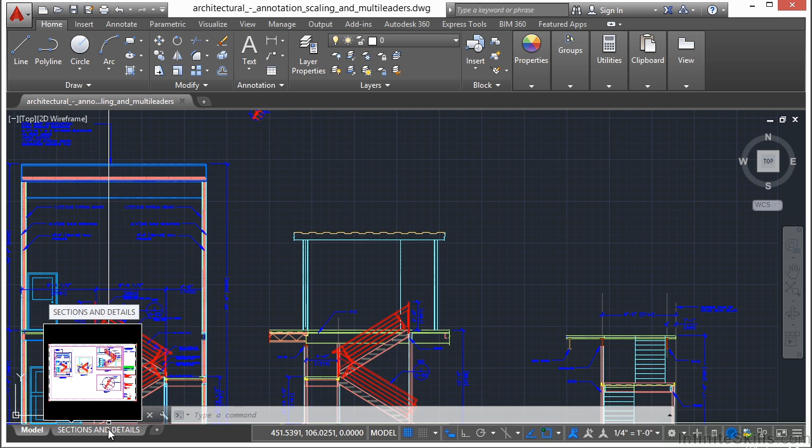So to start, we're going to make a new layout tab. To do that, just right-click on the layout tabs and click New Layout. That will create a tab called Layout 1. That name is fine for right now. So let's activate that tab by clicking on it. Just go to it, and we have a viewport already set up.

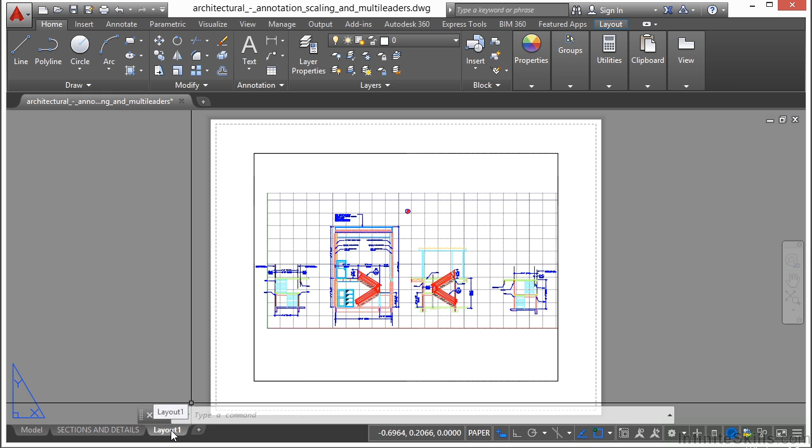Now let's go to the Page Setup Manager. It's real easy to get to. Just go down to your Layout tab, right-click on it, and go to Page Setup Manager. Now this window allows you to either pick a page setup already in the drawing or make a new one. Any names you see down here with asterisks, like layout and sections and details, are Paperspace tabs. Any others you'll see can actually be assigned to it. Right now we don't have any page setups in here.

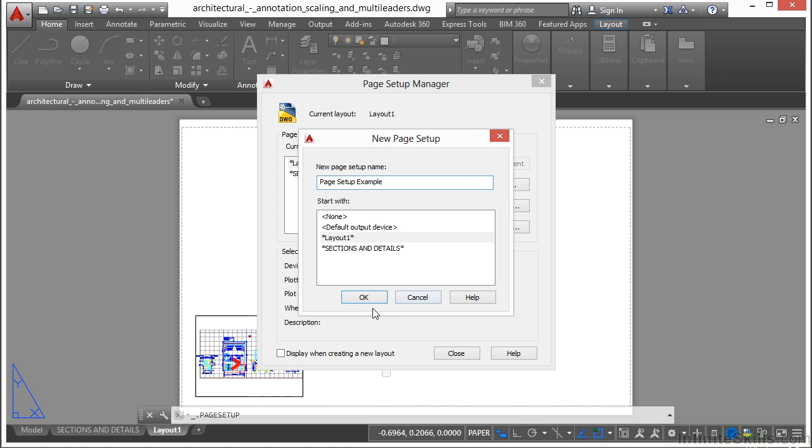So in order to use our page setups, we're going to have to create a new one. Click on the New button. Let's give this a name - I'm just going to call it Page Setup Example. Now what you want to do with the names is give it a name that defines or describes what's going on. So if you're printing a black and white 8.5 by 11, give it a name similar to that. Keep them short, but make sure they're clear and well defined so that anyone using them knows and understands exactly what it is you're trying to do with that page setup. So give it a name, click OK.

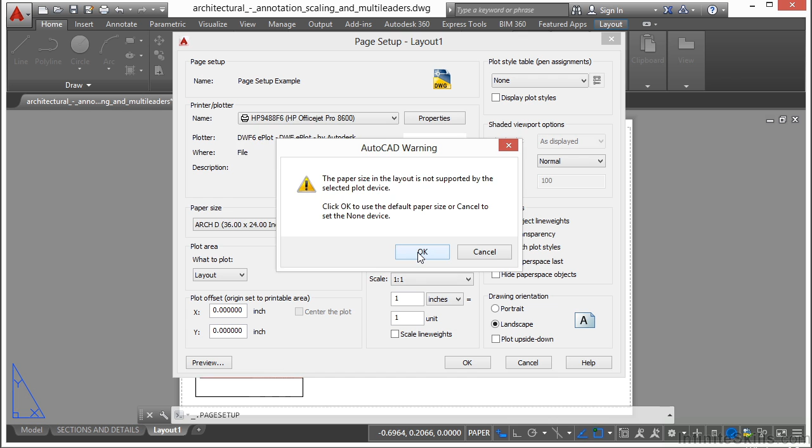Now we just go through all of the settings, just like we would when we were normally printing. So I'm going to pick my printer first. Since I only have one real printer to choose from, I'm going to pick it. And this gives me a warning - it says my page size is too big, and I realize that. I'm clicking OK, and it gives a description of what's going on here. Now I'm going to pick letter size for my paper size, and I want to pick extents. I want it to center the plot, and I want it to fit to the page. When you're ready, click on this preview, and the preview button will show you exactly what it's going to look like. See, that fits everything into an 8.5 by 11 size sheet.

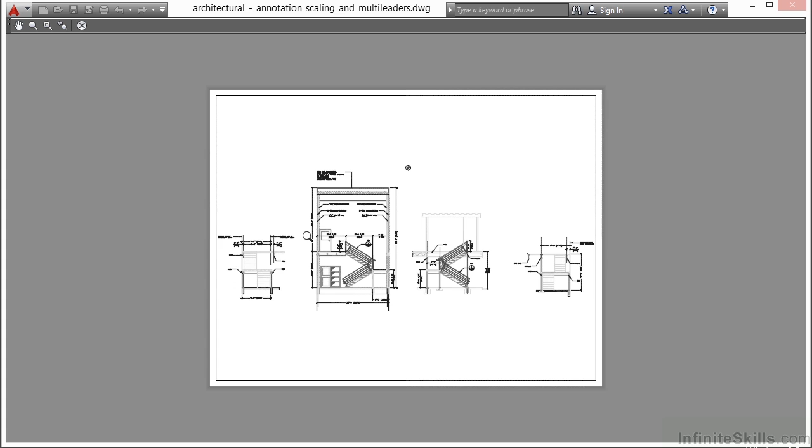Works perfectly for me. Now I can zoom in and out with my scroll wheel. I can also pan with my scroll wheel. Or if I right click, I can get to pan and zoom, or zoom window, or zoom original. Or when I'm finished, I just click exit.

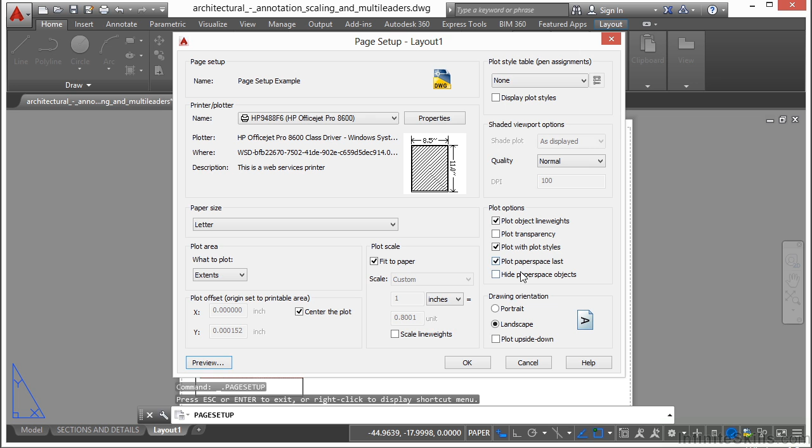Now when everything else is okay, make sure my portrait and landscape is set up. I'm not going to use a CTB file. Everything else here looks good. I'm going to click OK.

And now my page setup has been created, and now I can apply it to this Paperspace tab. So what I do is I select it, and I hit the Set Current button. Now when you do that, you'll see here it says Layout 1, and in parentheses it has the name of the page setup. That means it's been assigned to this Paperspace tab. This Paperspace tab does not have a page setup at all.

That's okay. I'm going to create one more, so I'm going to select New. Now you notice that I selected this page setup before I clicked New. This works just like it does in any of the other style creations, dimensions, text, etc. It will copy these settings, and then I'll just be able to tweak it however I want.

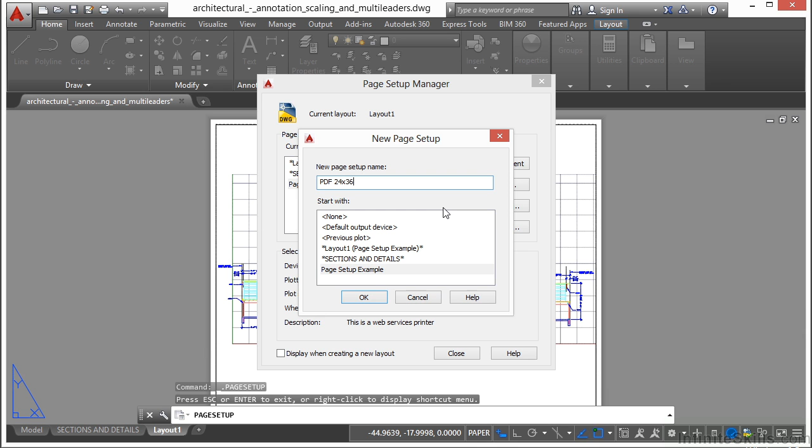Well, I'm going to call this PDF 24 by 36, because that's what I'm going to create. With this page setup, my drawings will be printed not to paper, but to a PDF file, and it will be full size, 24 by 36. So I'm going to click OK.

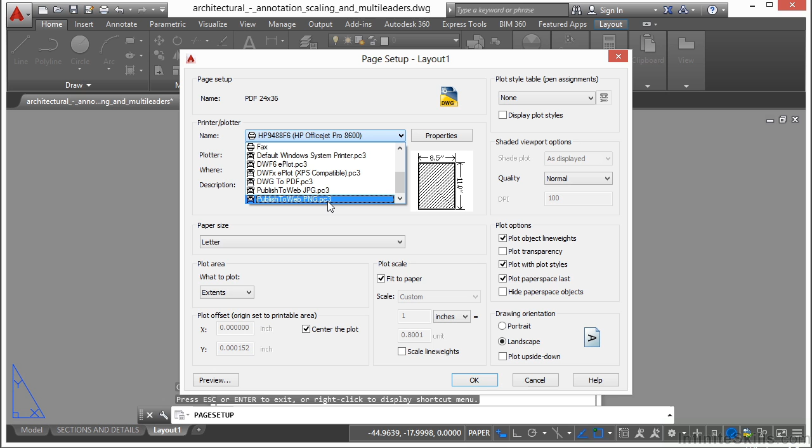AutoCAD, by default and out of the box, comes with several settings. I have some programs I use, like Snagit, OneNote, and Nitro PDF Creator, that will allow me to print to those file types. Also, you have a Microsoft XPS document writer, which you should have if you're running Windows. If you have a fax printer or your default Windows printer set up, you can print to those types of files. AutoCAD itself comes with settings to print to a DWF, DWFX, PDF, JPEG, or PNG file, and those are these options here. So instead of sending the document to paper, it sends it to one of these electronic file types. This is a great way to share your drawings via email.

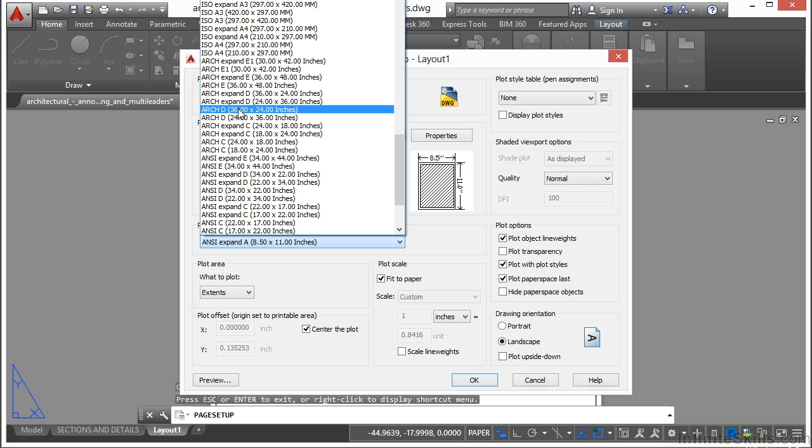I'm going to use the DWG to PDF file. I have a lot of options here available to me. Now, this is an architectural D size drawing, a 36 by 24 size sheet. I have two options here, 36 by 24 and 24 by 36. This drawing is 36 by 24 in reality - 36 wide, 24 tall. The first number in AutoCAD printing is going to be the width, so that's what I'm going to pick, 36 by 24.

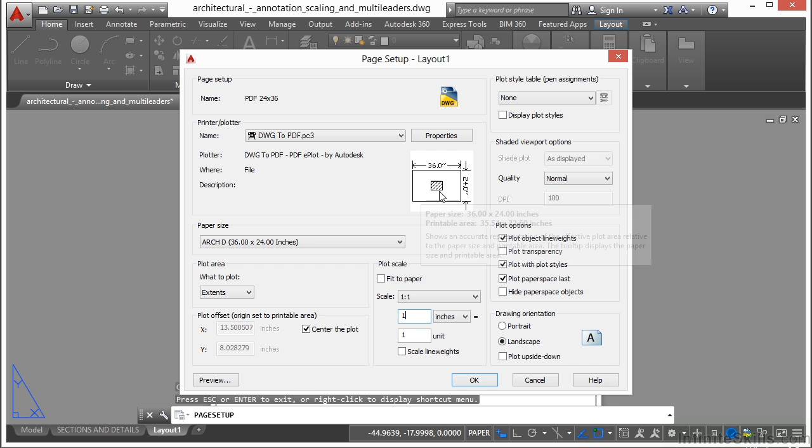Now I'm still set to drawing extents, and this is set to center, and set to fit to paper. I'm going to turn that off and change my units to 1. You can see here, this drawing is not really set up to be printed to that size. You'll find this happens quite often, where you think it's set up a certain way, but it really isn't. If I hit preview, you can see how small that is.

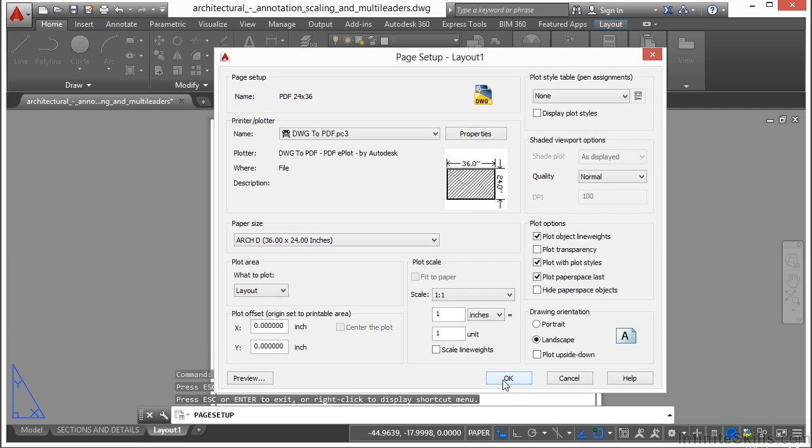What's happening here is that this Paperspace tab is set up to be 8.5 by 11. That's okay, because I'm not going to apply it to this Paperspace tab - I'm going to apply it to this other one. So I'm going to set this up to layout 1:1. Now it's going to be 24 by 36 when I use this setting. I'll click OK, and now it's here as an option available to me. I'm going to click close.

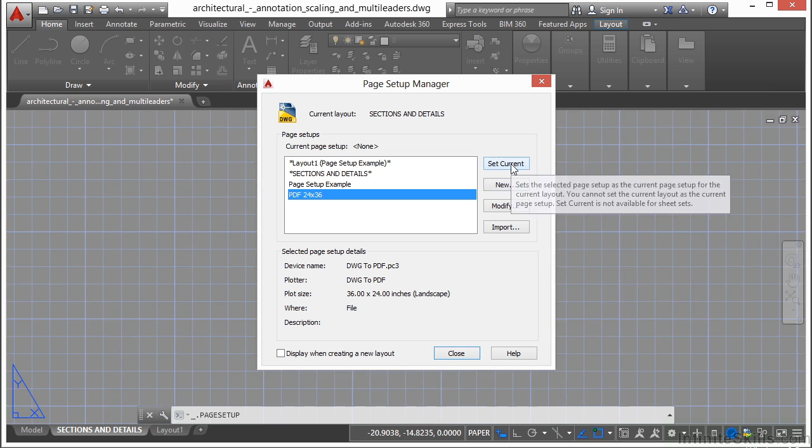I'm going to go to this Paperspace tab, right click on it, and go to my Page Setup Manager. For this Paperspace tab, I'm going to select my PDF 24 by 36, pick Set Current, and click Close. Remember I talked about that dashed line? Here it is right there - that's the dashed line. So I'm going to have to reposition my viewport and my other drawing objects here to make sure it fits inside my sheet.

So I'm using the Move command, selecting everything. Now they have these little guidelines here in this drawing, so I'm going to try to use that. You can see the white paper is right here - that also gives me a guide as to my paper size. Now you can't snap to any of those points, so you just have to eyeball it. Once you do that, let's look over here, and we see it seems to be fitting into everything, and we're good. Now we can save the file and go on from there.

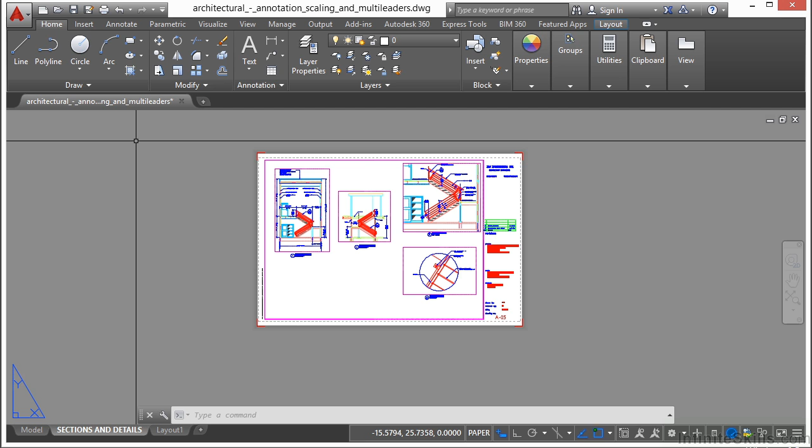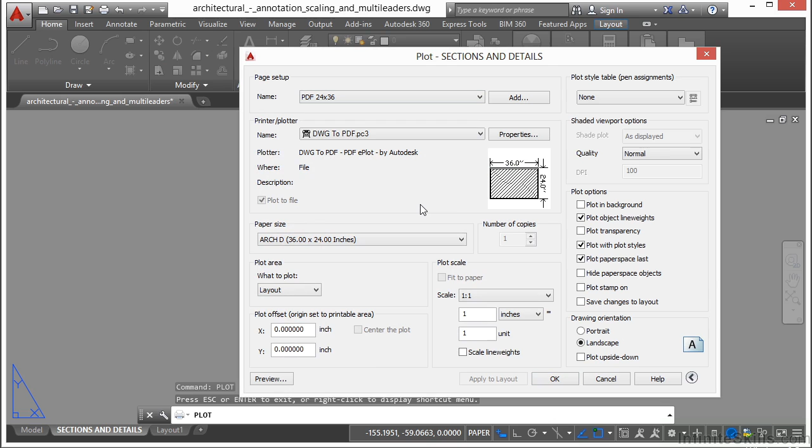Because now when I want to print, let's go to Print. I find my page setups, select it, hit preview, see that it works. Right click, exit, and then click OK. I don't have to go through any of these settings - they all come up automatically for me, and I know they're correct. So it saves time and makes sure you print correctly every time.